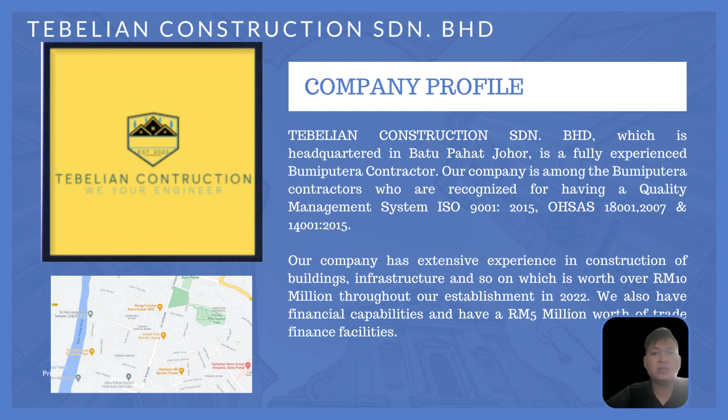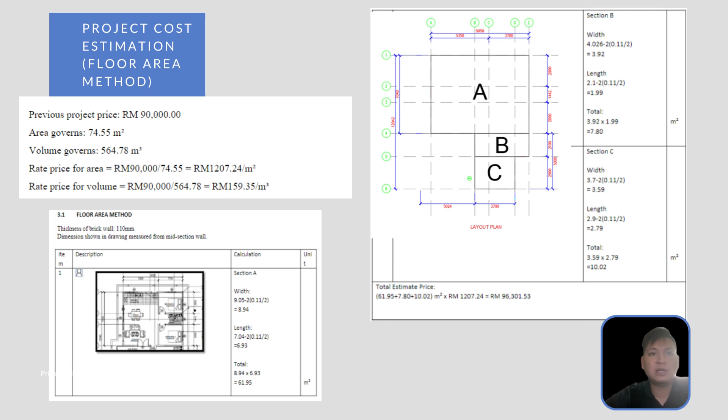First, I will start with project cost estimation, which is the floor area method. We can see here the previous project price is 90,000, area governed is 74.55 meter square, and volume governed is 564.78 meter cube. Rate price for area is 90,000 divided by 74.55, and we got 1,207.24 ringgit. Rate price for volume is 90,000 divided by 564.78, and we got 159.35 ringgit.

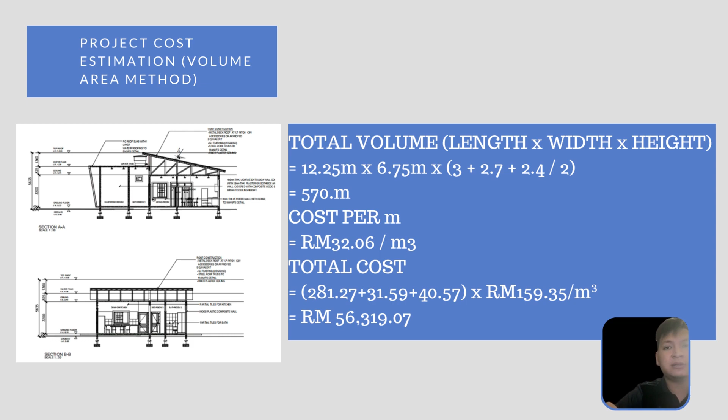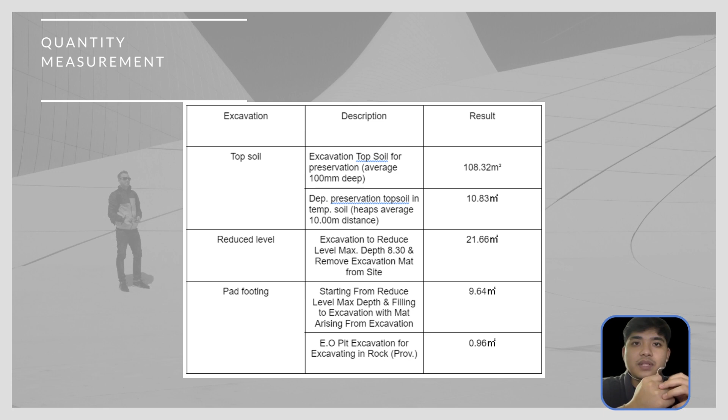So this is the quantity measurement for topsoil, reduced level, and pad footing. For topsoil, excavation topsoil for preservation is 108.32 meter square, and depth preservation topsoil in temporary soil is 10.83 meter cube. For reduced level, excavation to reduced level max depth is 21.66 meter cube, and then pad footing starting from reduced level max depth and filling to excavation with material arising from excavation is 9.64 meter cube, and EO pit excavation for excavating in rock is 0.96 meter cube.

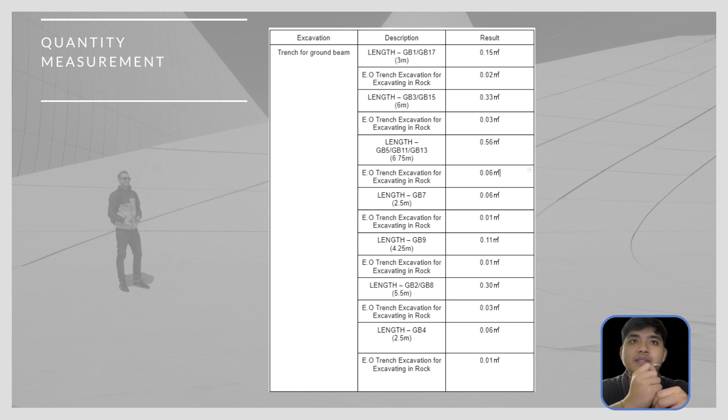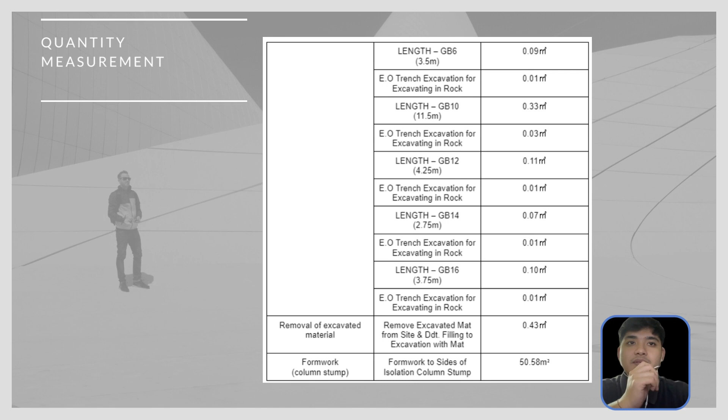So this is the quantity measurement for trench for ground beam. As you can see, this is the value that we have calculated. Next, quantity measurement for removal of excavated material is 0.43 meter cube, and formwork for column stump is 50.58 meter square. Quantity measurement for steel reinforcement for pad footing is 197.20 meter, and for the column

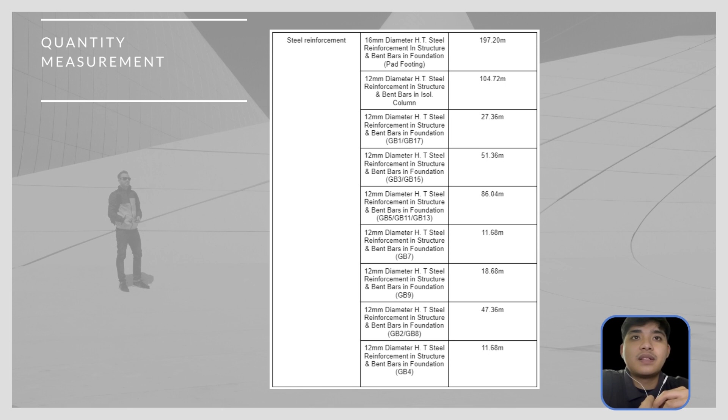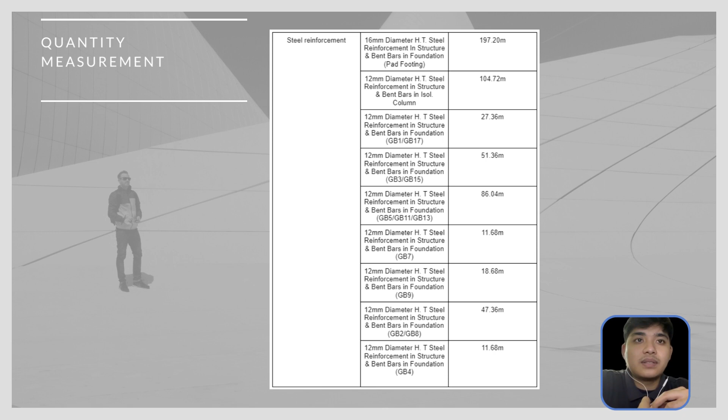is 104.72 meter. Then these are the bars that we chose: GB1 and GB17, which is 27.36 meter. For GB3 and GB15 the result is 51.36 meter, for GB5, GB11 and GB13 it is 86.04 meter, and GB7 is 11.68 meter. GB9 is 18.68 meter. GB2 and GB8 is 47.36 meter. GB4 is 11.68 meter. GB6 is 15.68 meter. GB10 is 47.68 meter. GB12 is 18.68 meter, GB14 is 12.68 meter, and GB16 is 16.68 meter.

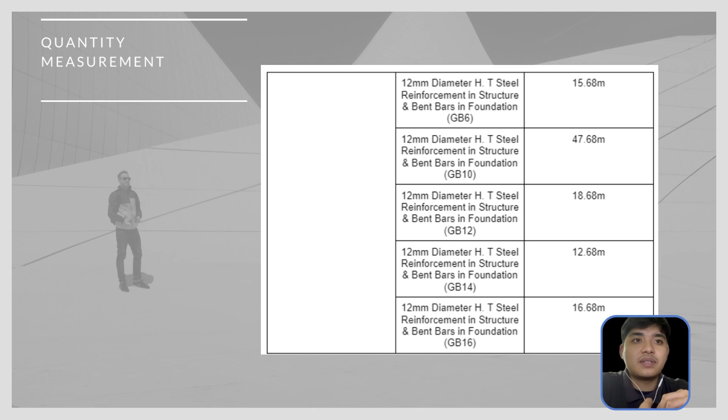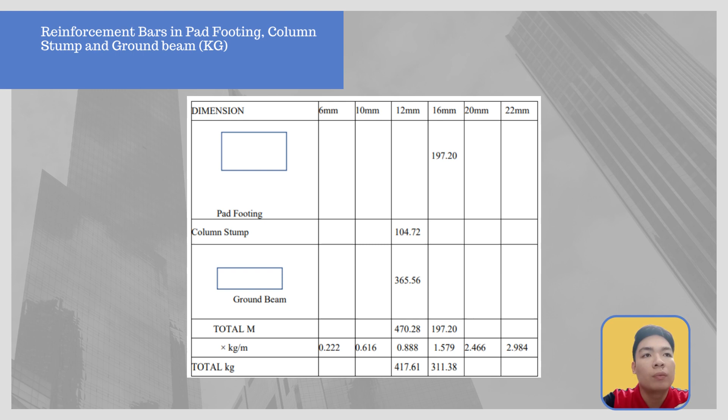So I will present about the reinforcement bar in pad footing, column stump, and ground beam. In the picture above, this is the dimension for pad footing, column stump and the ground beam. The total meter for the 12 mm is 470.28, and for the 16 mm is 197.20. The total kilo for 12 mm is 417.61, and for the 16 mm is 311.38. Next is the bill of quantity for elements of structure work.

So the next item is for the maximum depth not exceeding 1 meter for pad footing. We also have high tensile bar reinforcement to concrete as described in G, H, I, and J. We also have the sand filling, so filling cable trench with the approved sand.

So for element 2, we have the finishes. For finishes, we have the wall finishes and cement and sand with an approved plasticiser as specified. So we have item 2 here for A and B. B is the tile work.

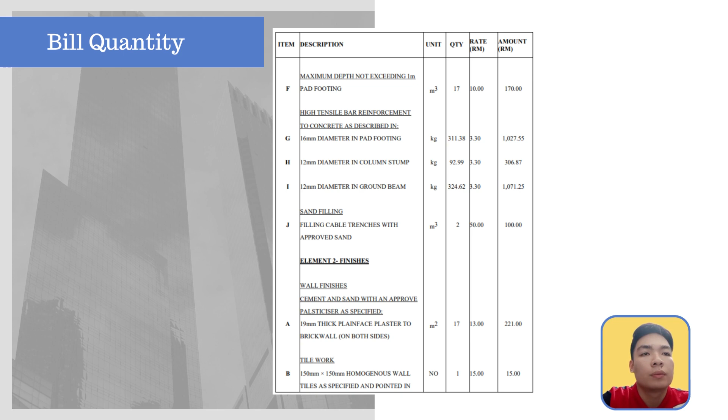Next for the bill of quantity, we move to element 3, which is ceiling finishes. For item A, we have the brandering on the trusses at 600 c/c to receive the ceiling board. Item B is the soft board. Item C is the cornice, and D is painting the ceiling board. So this is the unit, quantity and the amount.

Next is the roof. We also have multiple elements in the roof. For example, we have rafter, strut, purlin, ridge board, wall plate, and fascia board. So this is the example for the unit, the quantity and the amount.

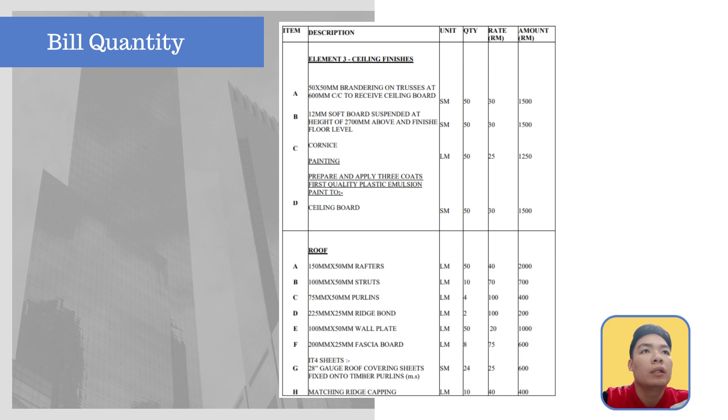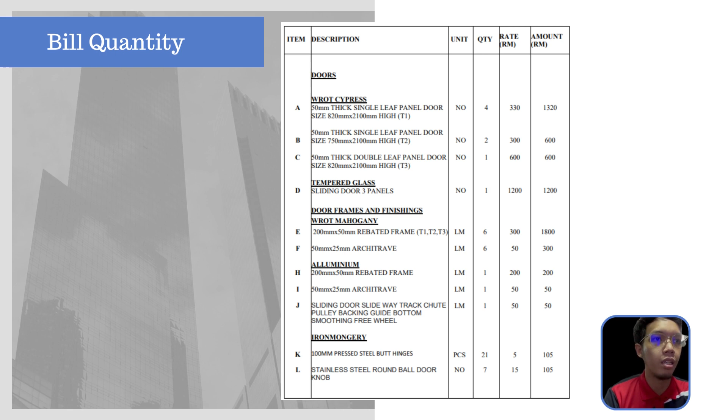Our next item included inside our bill of quantities is doors. Our doors are made of wrot cypress, and covered with tempered glass. The door frame and the finishing are made of wrot mahogany, and also aluminium. And there's some ironmongery inside our doors material.

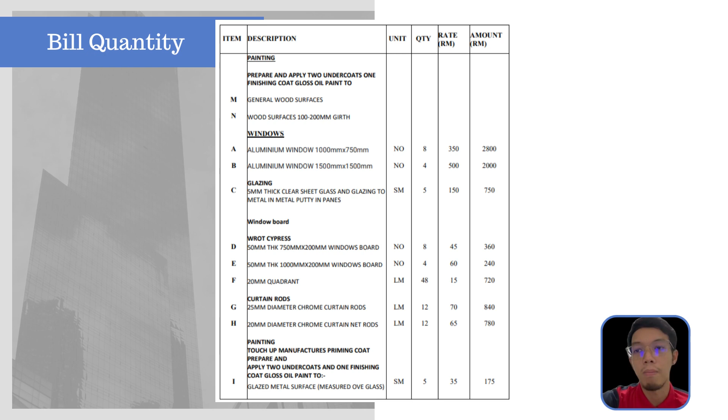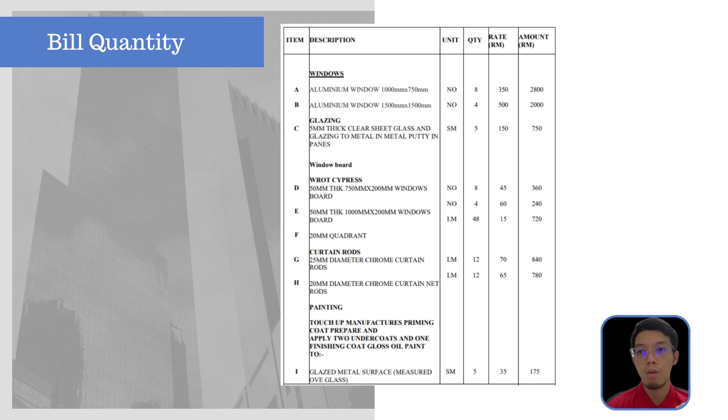Our window boards are made from wrot cypress, which is a wooden material. We also have 12 units of them, for each of the windows from the description above. Then we have the curtain rod, and for the finishing we will put painting, which will touch up the manufacturer priming coat and apply 2 undercoats and 1 finishing coat gloss oil paint.

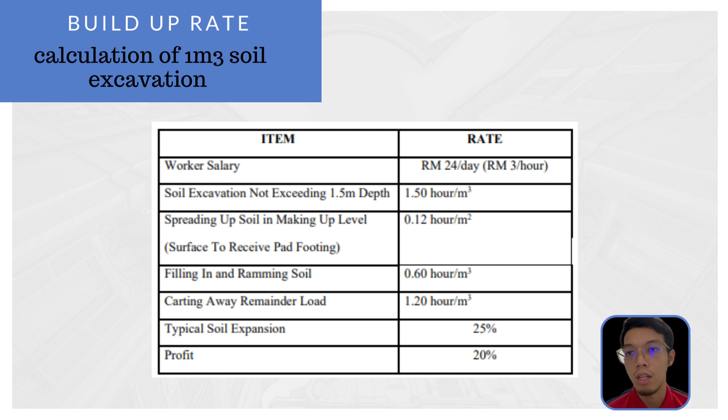Our next calculation is the build-up rate for 1 meter cube of soil excavation. The items included in the build-up rate are worker salary, soil excavation, spreading soil and making up to level, filling and ramming the soil, carting away the remaining load, typical soil expansion, and we set our profit at 20%.

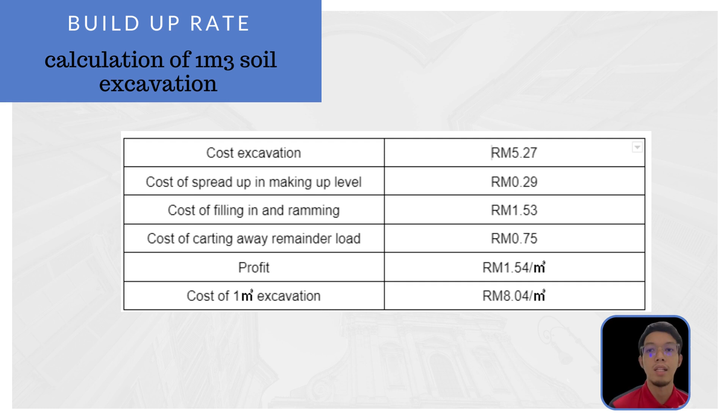After calculating based on the rates we proposed, the cost of excavation is 5 ringgit 27 cents per meter cube, the cost of spreading and making up level is 29 cents, the cost of filling and ramming is 1 ringgit 53 cents, and the cost of carting away remaining load is 75 cents. The profit from each meter cube is 1 ringgit 54 cents. So the total cost of 1 meter cube excavation is RM 8.04 per meter cube.

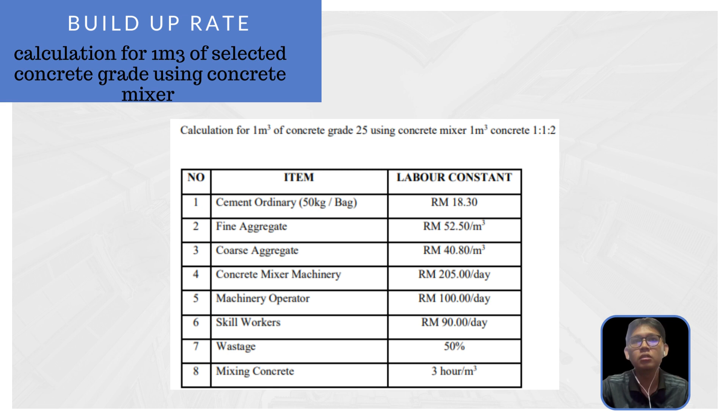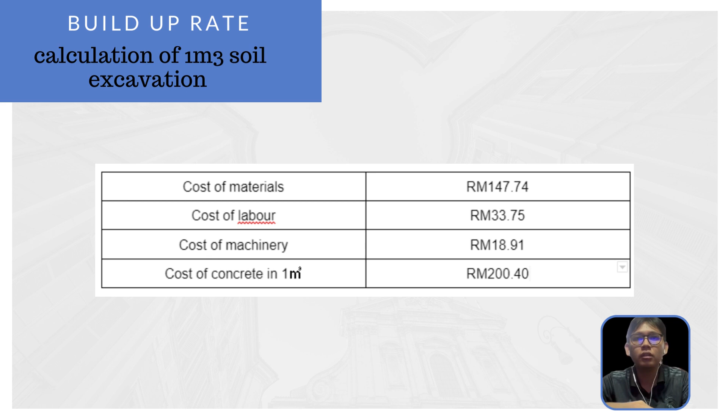I will continue presenting the build-up rate. This is our calculation for 1 meter cube of selected concrete grade using a concrete mixer. Calculation for 1 meter cube of concrete grade 25 using a concrete mixer, 1:1:2. This is our data. After the calculation, we get a cost of material of RM 147.74, cost of labor of RM 33.75, cost of machinery of RM 18.91, and the cost of concrete for 1 meter cube is RM 200.40.